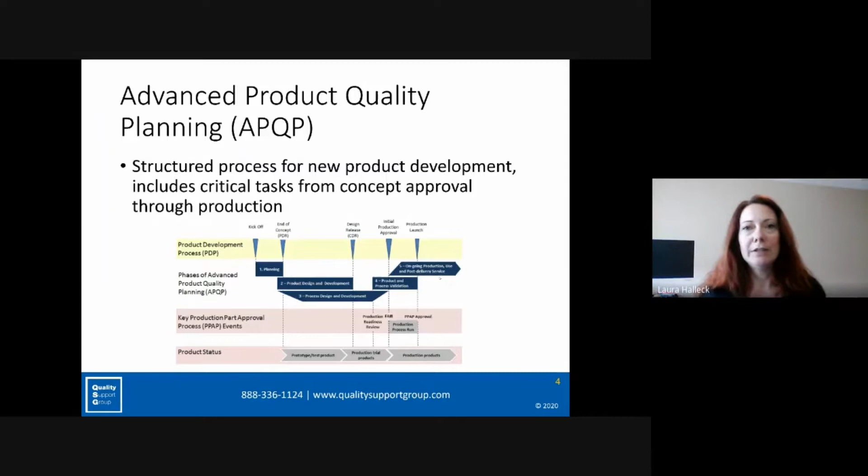APQP is a structured process for new product development, and includes the critical tasks from concept approval through production. It's broken down into a 5-phase process. So we have the planning phase, product design and development, process design and development, product and process validation, and then ongoing production and post-delivery service in phase 5. I'll give a brief overview of each of these phases a little bit later on in the presentation.

So the purpose of APQP is to provide a structured method to ensure the new products satisfy customer needs and wants. It works to drive on-time and on-quality delivery of product by monitoring key project deliverables, establishes a mechanism for early detection of quality and design problems, and also provides opportunities for continual improvement.

The benefits of APQP are to help satisfy the customer with improved product quality, because we can better anticipate and mitigate risks, eliminate defects, and reduce process variation. It reduces lead time by reducing waste and rework and better managing our capacity, which drives overall lower costs.

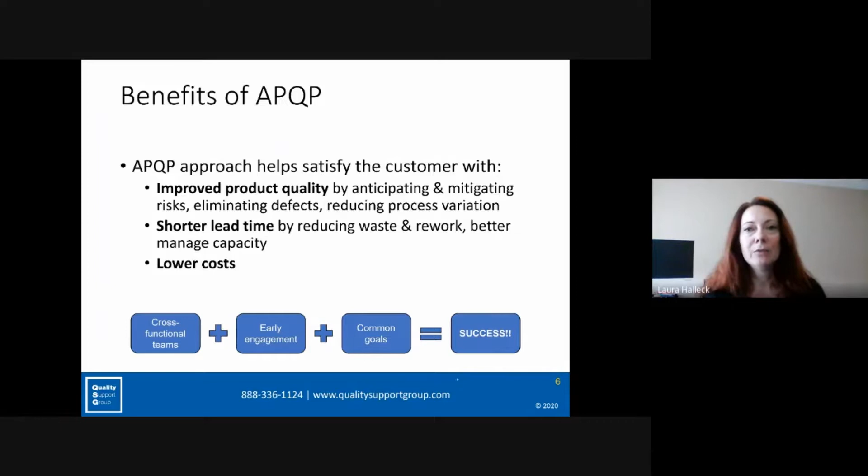One of the key tenets of the APQP process is organizational commitment and management support. We need to ensure that top management is engaged in the APQP process. They should be part of APQP training, responsible for allocating resources to projects, leading periodic reviews of the overall APQP program, standardizing APQP practices across the organization, and also removing roadblocks for the APQP project team.

The success of the APQP program depends on support across the whole organization. It's very important to have management engagement and commitment from product launch through closure.

Another key aspect of the APQP process is for it to be managed through a cross-functional team approach. We want to get away from silos or single departments running through the various aspects of this process. Typically, we include engineering, procurement, quality, sales, field service, and others as appropriate. You may include some key stakeholders, such as your customers or suppliers, depending on the scope of the project.

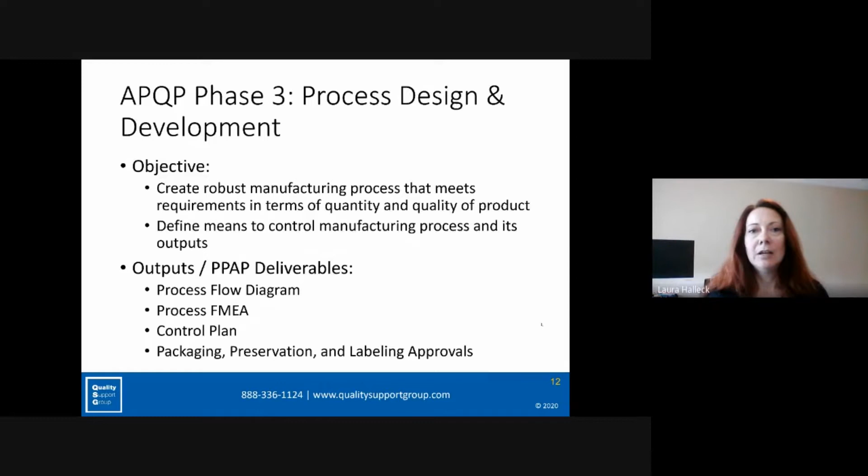In phase 3, process design and development, our objective is to create a robust manufacturing process that meets the requirements in terms of quantity and quality of the product, and define the means to control the manufacturing process and its outputs. The key outputs here are the process flow diagram, the process failure modes and effects analysis, FMEA, the control plan, and packaging, preservation, and labeling approvals if required by your customer.

Phase 4 is product and process validation. The objective of this phase is to collect data that demonstrates manufacturing and assembly processes can produce conforming product at the required rate, and determine the process readiness for entry into serial production.

Phase 4 is where we run what we call our significant production run, so that we can take the data that we're going to be using for these deliverables listed below: the measurement system analysis or gauge R&R, our initial process capability study, where we analyze our CPKs, approved first article inspection report, which is our standard AS9102 format, and our approved PPAP. So phase 4 is primarily around generating the data that we need to submit our PPAP and obtaining the approval from the customer.

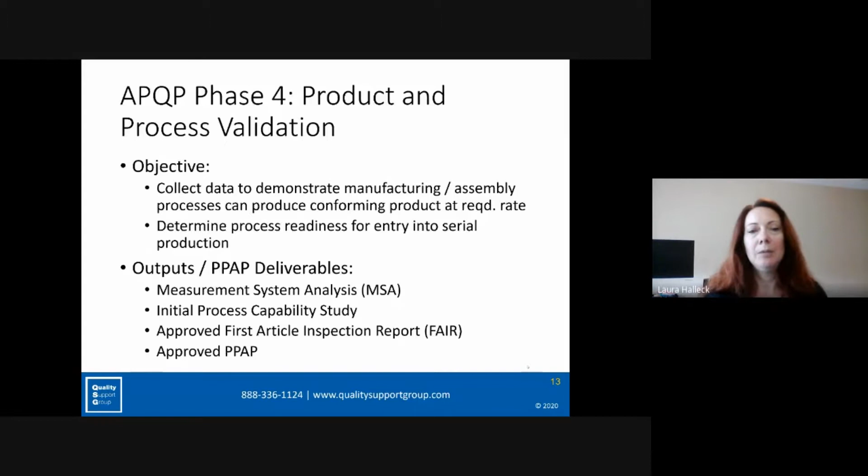Phase 5 is production, use, and post-delivery service. The objective of phase 5 is to evaluate if the project objectives have been achieved, record the lessons learned to drive robust product realization processes, and implement actions to increase customer satisfaction. Our outputs here are that we've achieved our project goals, including reliability, quality, customer satisfaction, and on time, on quality, on cost, production, and service. So phase 5 is really about continual improvement and reducing variability once we have launched into production.

When we look at APQP reporting, there's a couple of different things we want to look at. One is assessing our deliverables, looking in terms of on quality according to checklist criteria, and on time according to our APQP timing. The checklist criteria is referring to a set of checklists for each of the key deliverables, available through the supply chain management handbook. And I've included a link to that at the end of this presentation.

And there's a rating system of red, yellow, and green. Green would be that everything on the checklist has a positive answer and is being completed as planned. Yellow is there may have been an issue, but there's a plan to resolve it and no impact to product delivery schedule. Red would mean that there would be some impact to the final product delivery schedule.

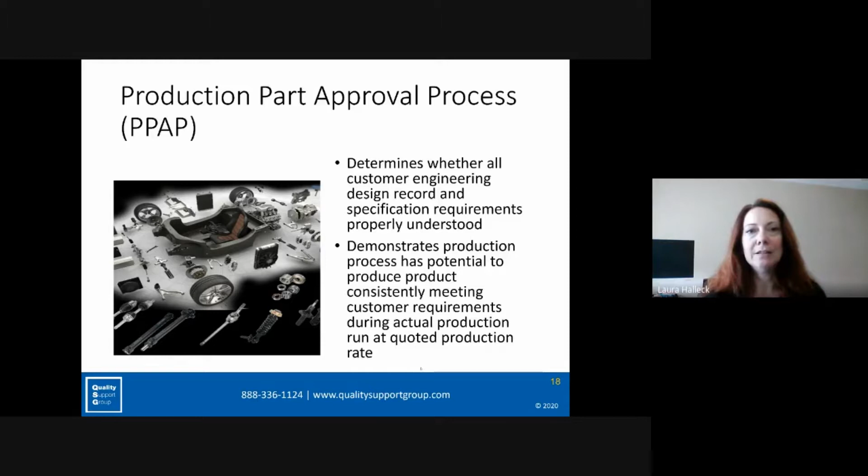Moving into the production part approval process, PPAP. PPAP is focused on determining whether all customer engineering design record and specification requirements are properly understood, and demonstrates the production process has the potential to produce product consistently meeting customer requirements during actual production run at the quoted production rate. This ties into what I just talked about in phase 4 of the APQP.

The benefits of PPAP are to help maintain design integrity because you're checking between the supplier and the customer that we're both working towards the same revision levels and the same specifications. Identifies issues early for resolution. Reduces warranty charges and prevents cost of poor quality. Assists with managing supplier changes because you can do additional PPAPs to qualify those supplier changes over time.

Identify suppliers that need more development. So if you have 2 or 3 suppliers of a similar type of part and they've all submitted a PPAP and one is struggling to pass their PPAP and the other ones are passing easily, then you know where you need to focus your efforts for supplier development. And also improves overall quality of product and customer satisfaction.

When is PPAP required? So whenever you have a new part or product. It could be that you already have that part, but it is now going to be supplied to a new customer. That may also require PPAP. If you need to correct a discrepancy from a previous PPAP submission, any engineering changes to the design records, specifications, or materials for the production product or part number, and any other additional requirements as specified by the customer. So the best way to think about it is PPAP is required with any significant change to your product or process.

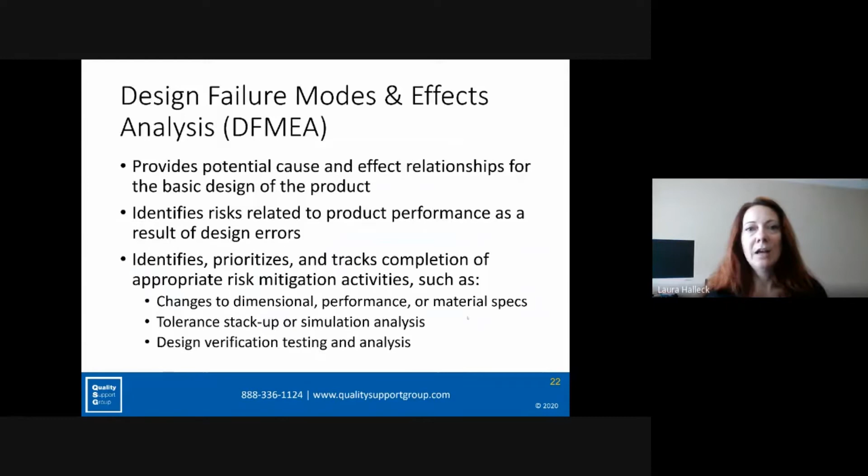First being the design failure mode and effects analysis, the DFMEA. The DFMEA provides the potential cause and effect relationships for the basic design of the product. It identifies risks related to product performance as a result of design errors, identifies, prioritizes, and tracks completion of appropriate risk mitigation activities, such as changes to dimensional performance or material specifications, tolerance stack-up or simulation analysis, and design verification testing analysis. Here's an example.

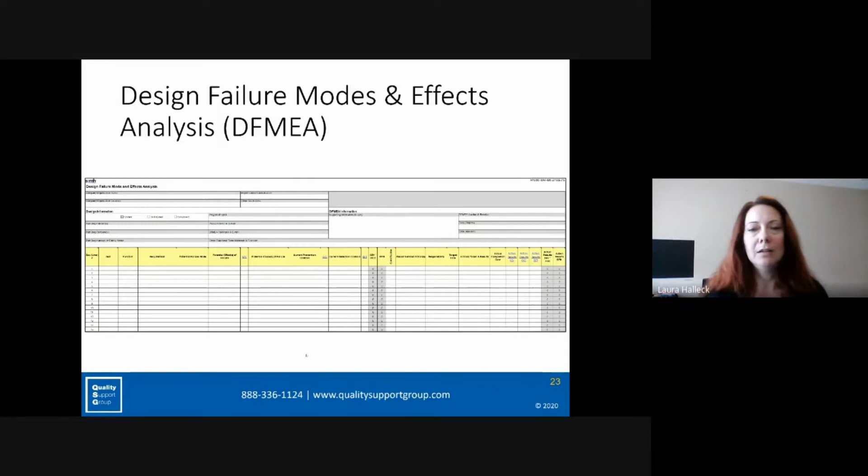And then the score is calculated here, the RPN, or risk priority number, which gives us an indication of priority for taking action. And for our high risk items, we document the actions we've taken and rescore. I did spend some time trying to find some examples to share with you. Unfortunately, all the examples I have are sort of company specific, so I don't have a generic example to share with you. But this template can be found at the IAQG Supply Chain Management Handbook website, and that link is at the end of the presentation.

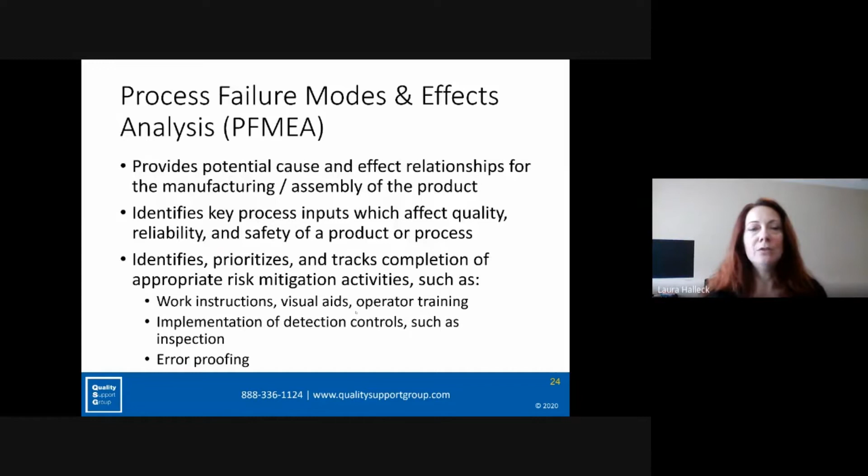The next tool is the process failure modes and effects analysis. So it works very similarly to the design FMEA, but its focus is on the manufacturing and assembly of the product, identifies key process inputs which affect quality, reliability, and safety of the product or process, and identifies, prioritizes, and tracks completion of appropriate risk mitigation activities such as work instructions, visual aids, operator training, implementation of detection controls such as inspection, and error proofing. And these detection controls will feed into your control plans. Again, this is the template, same fields as the design FMEA.

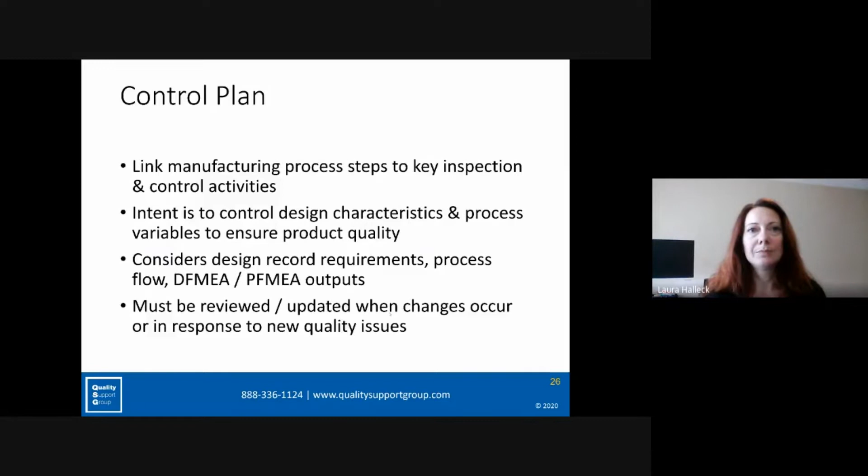The control plan links our manufacturing process steps to key inspection and control activities. The intent is to control design characteristics and process variables to ensure product quality. It considers our design record requirements, our process flow, our design FMEA, and process FMEA outputs. So it basically ties together all of these other pieces. And we need to make sure we're reviewing it and updating it whenever changes occur or in response to new quality issues. I do have an example of a control plan here.

This is related to the assembly of a chair. So we're looking at the product characteristic. In this case, it's a part orientation for this assembly, and how we control that part orientation is through an error-proofed fixture. The frequency of control here would be continuous because it's error-proofed. So there's no reaction plan required in that case because it's error-proofed.

The process characteristic here is the fixture itself that we're using for the alignment, maintaining a position within a certain tolerance. And we're going to verify this error-proofed fixture using calipers once a month and recording it in a log sheet. If we find it to be out of the tolerance, then the reaction plan is to tag the fixture and submit it for repair. That's just a brief example of how the control plan can be used to document the controls you have in place for your process.

Another tool I want to talk about is Measurement Systems Analysis, MSA, also known as Gauge R&R. The difference between the two terms is that MSA refers to the various types of analysis that can be done on your measurement systems, where Gauge R&R is a specific study particularly done for variables data.

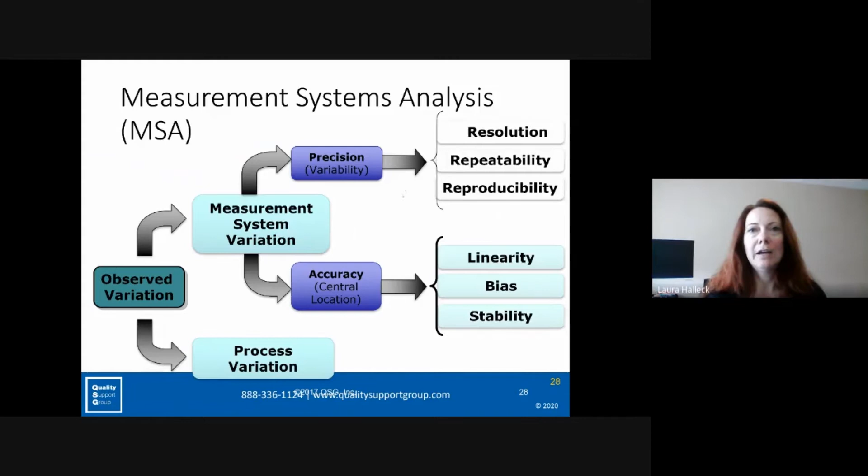Very briefly, resolution is the number of discernible digits on an instrument. So for example, a micrometer has a much greater resolution than a ruler. It's important to make sure that the proper measurement tool has been identified for whatever measurement is being taken. If in your MSA study you find that you have an error in resolution, it means there's an inability to detect small changes, which is generally because of having the wrong measurement device selected, or the divisions on the scale not fine enough to detect changes.

Repeatability is the variation between successive measurements of the same part by the same person using the same instrument. So under identical conditions, do we get the same results? And this generally is attributed to variability of the measurement system itself, but can also be caused by a lack of training or standard operating procedures, so the operator is doing it slightly differently each time.

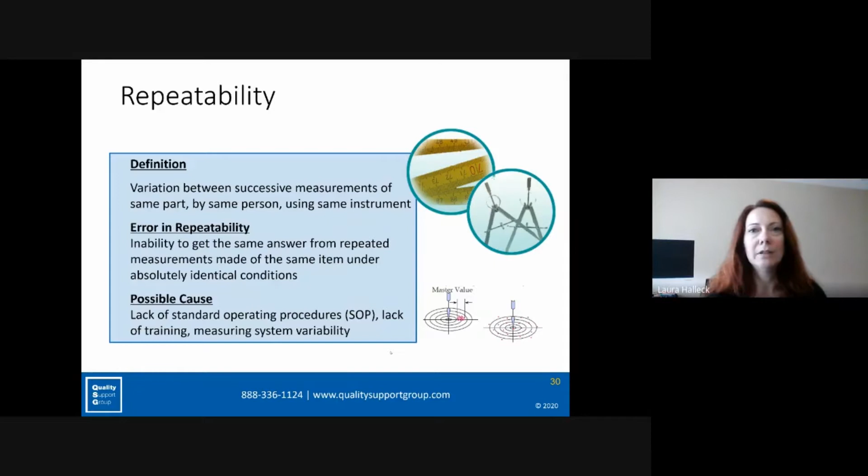Reproducibility is a difference in measurements made by different people using same or different instrument. So an error in reproducibility is an inability to get the same answer from repeated measurements under various conditions from different inspectors. And that's generally due to a lack of a standard process or a lack of training, that things are being done differently each time. I'm not going to go into the details of how to run the study here. I just wanted to give a little bit of a brief overview.

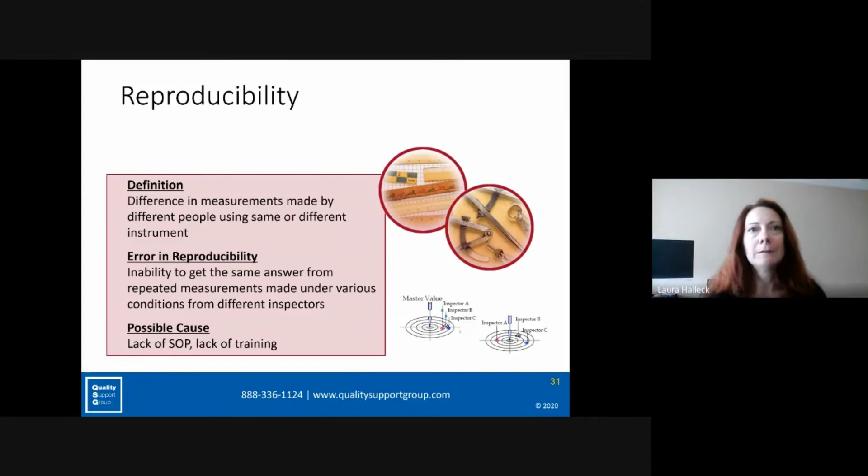Process capability is another key piece that we're going to be looking at as part of our PPAP submission. This identifies the extent the process is likely to produce items acceptable to the design. Our key characteristics with a CPK of less than 1.33 for aerospace require 100% inspection or measurement. In automotive, that level is 1.67. So aerospace, the number is a little bit lower, and that's generally because of the lower volumes that we're dealing with in aerospace industry. So this is just some examples of what our process can look like.

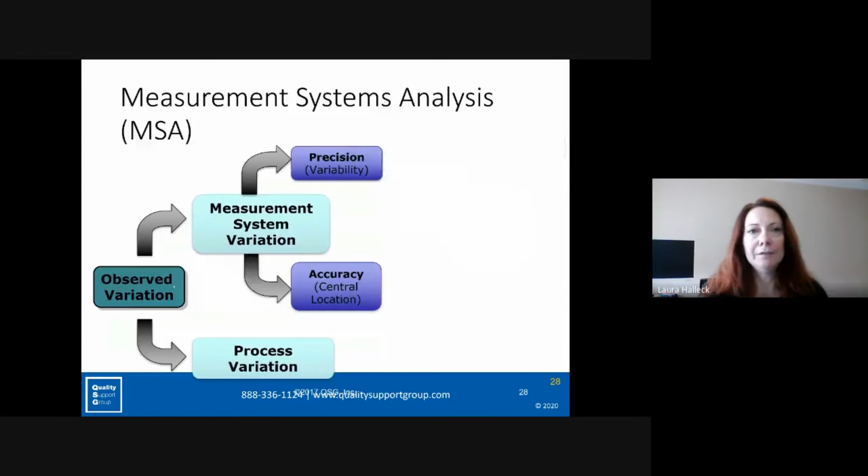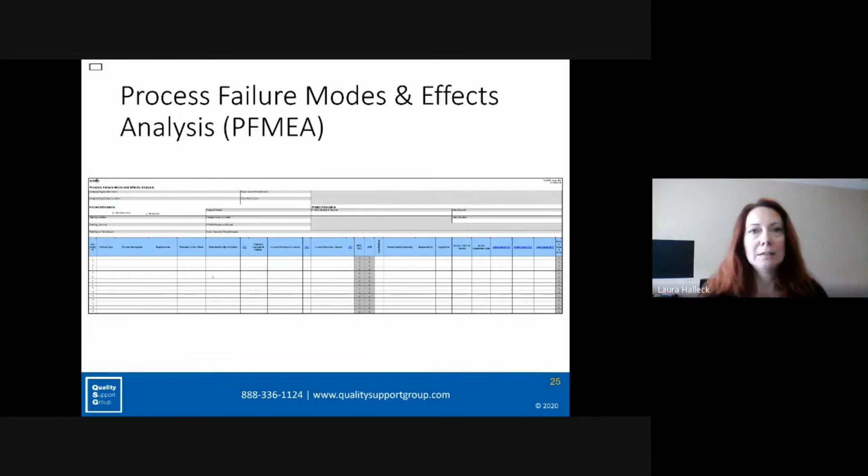The product itself is fine, but it's logistical type problems. So we need to make sure we include all of those steps in the process flow diagram. And then in our process FMEAs, each of those steps in the process flow diagram will be reflected. So here we have a process step. This would be the step from the process flow diagram, and we'd analyze the failure modes associated with that step.

And then in the control plan, the same idea. We have the process step here. These would be the same steps from our process flow diagram as well. So those three are tied together. If I add an additional item into the control plan, because I know I need additional inspections, then I need to go back to my process flow and add that inspection step, as well as go back to my FMEA and make sure I've analyzed the potential failure modes associated with that step.

Okay, great, thank you. Next question has to do with process capability, and it's another great question. Process capability studies are usually based on a usual volume. What if your entire build never reaches that volume? What is AS willing to accept? Yep, this is one of the key differences between the automotive standard and the aerospace, in that there's an understanding with the aerospace standard that the volumes are different, in many cases extremely lower.

The main reason for needing to do a process capability study is so that you can use sampling in your product acceptance. So for automotive, if your CPK is greater than 1.67, or in aerospace it's greater than 1.33, then I can use sampling for acceptance. If my volumes are so low that I can easily do 100% inspection, because every single piece that I'm building, I'm taking measurements on, then there really isn't a lot of value in the process capability study.

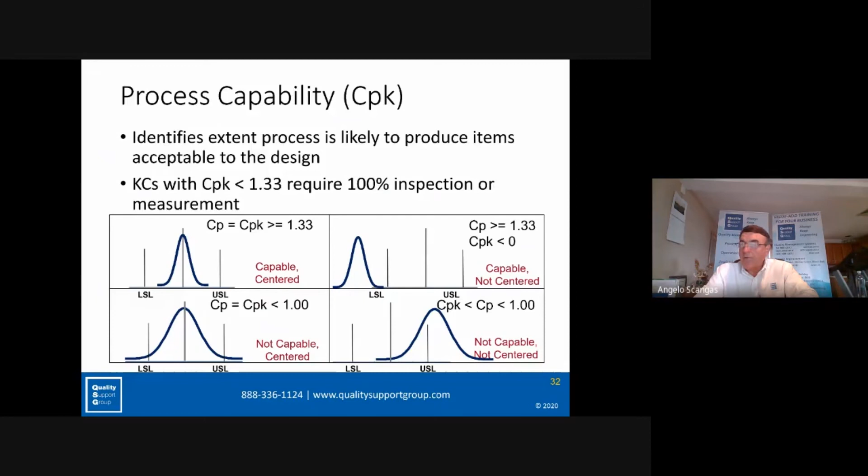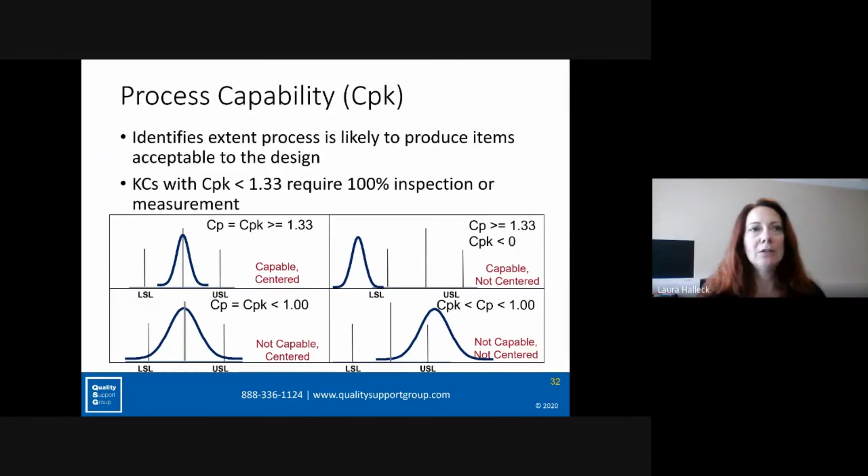Yep. So can you also talk a little bit about customer specific requirements? How are they integrated into this APQP PPAP process? So that works similarly to the automotive approach, where obviously any modifications that your customer makes or any additional requirements that they have would be included as part of the PPAP package. I believe it was item 10.

So depending on your specific customer, what they flow down through their supplier requirements manuals will dictate what additional items or what modifications you might have in customer PPAP requirements, certain volume requirements, things like that, based on what the product is for that particular customer. So it works fairly similarly as with the automotive, where it's one of the items listed out in the PPAP file, and it could be a myriad of things just depending on the customer and their needs.

Okay. So another very good question, Laura, has to do with when a PPAP is required. Mm-hmm. This is something I think you and myself and other people that have been working with the automotive and aerospace industry have been struggling with. I think always when a new part is going for approval, we all know that a PPAP is required, but there's many other occasions where a PPAP is required.